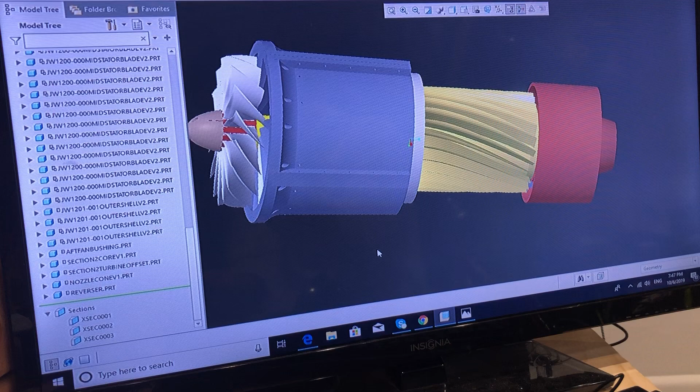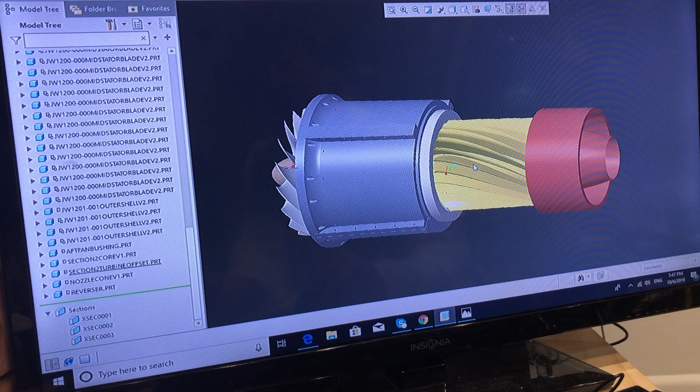So this time I can explain more to understand what I'm trying to do here. Basically, this is my prototype demonstrator to how all this design and flow will work, and that's what I'm trying to study. After that, I'm trying to build all this in a full metal part other than 3D printed plastics. So I am very beginning step of development and trying to study how all this works.

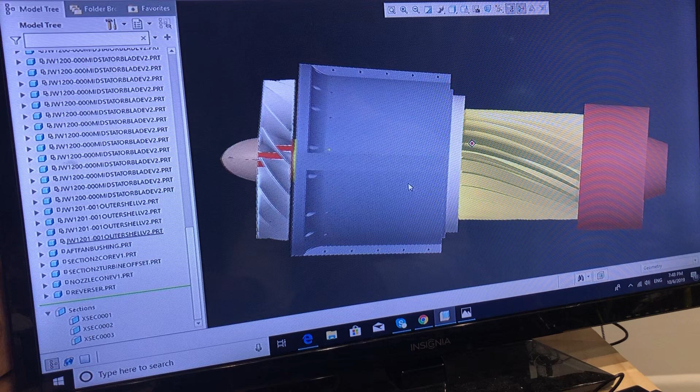So this is what I can explain for now, and then later on if I add more parts I can probably explain better what I'm trying to do here.

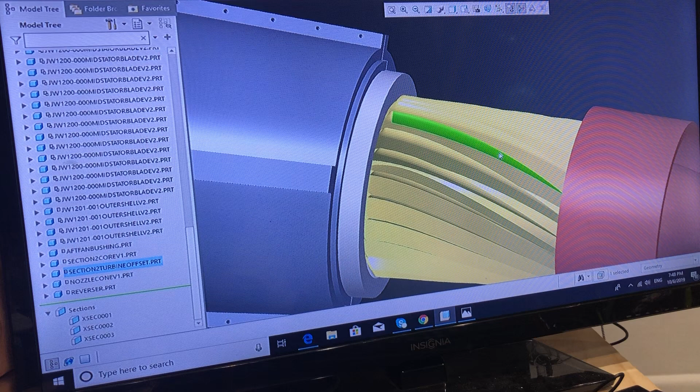So I've added 3 more parts here, which is a stationary stator section, this is the turbine section, and this is another stationary nozzle section. It doesn't have the support here yet. I've actually designed it, but I removed it because I had to think of something else on designing.

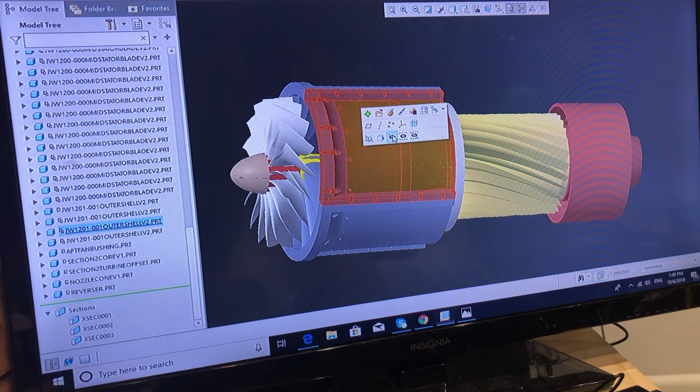But it's pretty much more shaped, or has more of an engine shape than last video. So let me explain.

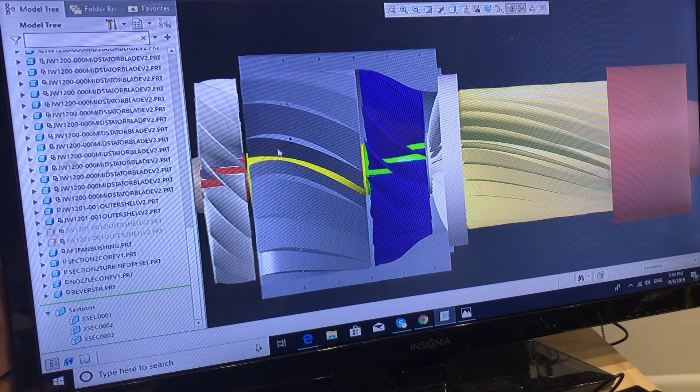What I'm trying to achieve here is airflow goes in there and is directed by the stator, the middle stator, and then captured by the secondary blade. And then there's also a secondary stator here, which directs the flow to the spinning way of the turbine, and this turbine will exhaust airflow toward backward.

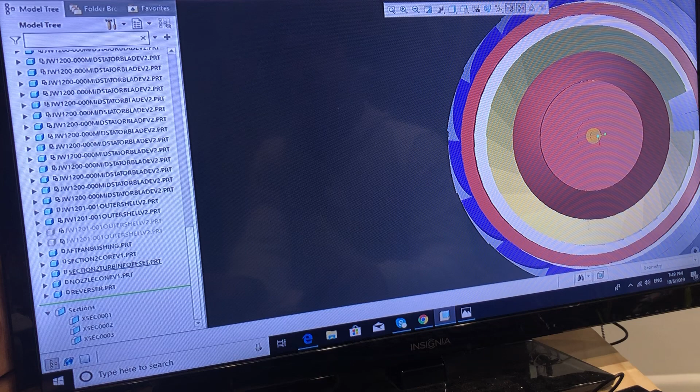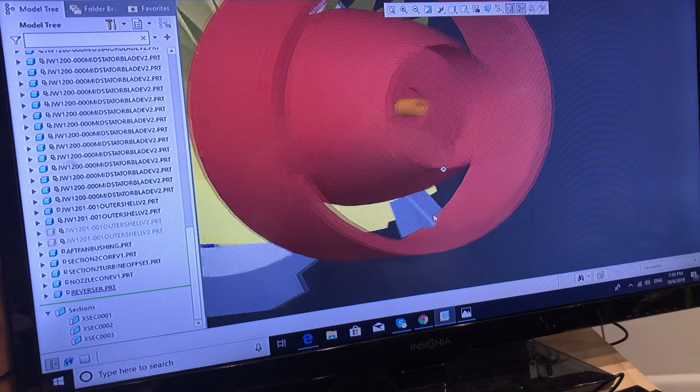I have something concept drawn in here. It's not finished yet, so I'm actually thinking about what I'm gonna do on this right now. But basically what it does is it'll block the flow and spit out the exhaust downward, which makes a vertical takeoff and landing possible.

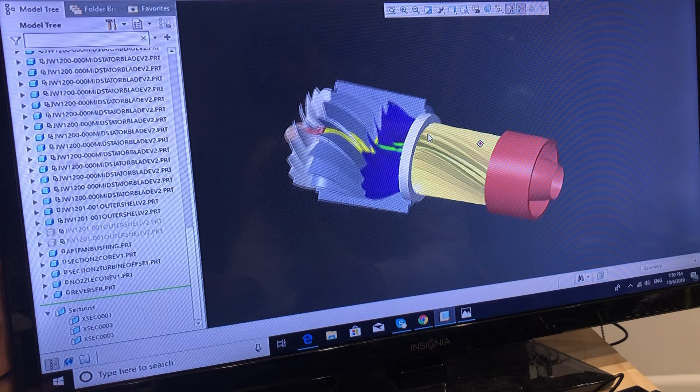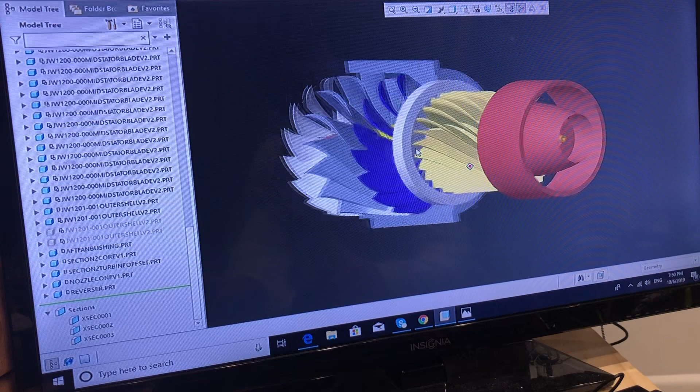Without moving or rotating the whole engine this way, but just changing a little bit of mechanism in here, closing this and opening up the ports or gates here, and spitting out the exhaust downward. So I'm not there yet because I don't have a clear idea yet, but I have some concepts in my head. So next video I'll probably update that as well.

On this part, what makes it a little bit difficult is I have to design each part within the capability of my 3D printer, which is not very large. It's only like 9 inches by 9 inches by 9 inches.

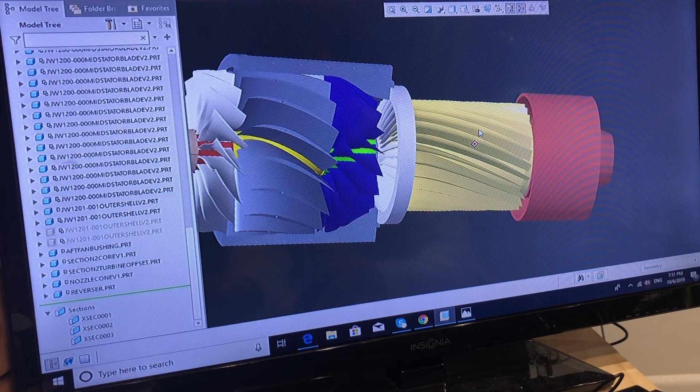So I also have to make sure that none of these parts start printing in the air, because that would actually mess up the whole print process. I have to keep that in mind, which is, I would say, difficult—maybe not difficult, maybe a little bit of an annoying factor, but it's okay. I can just work with what I have here.

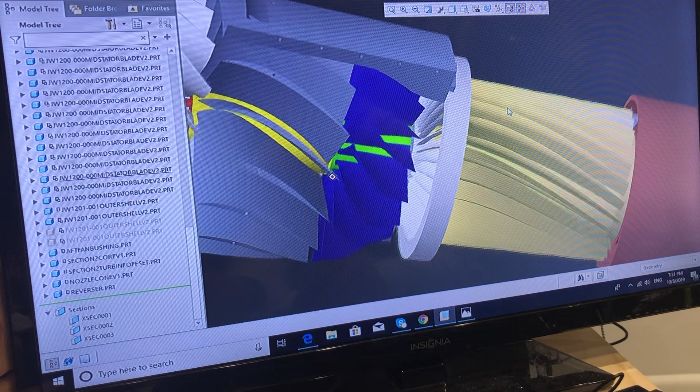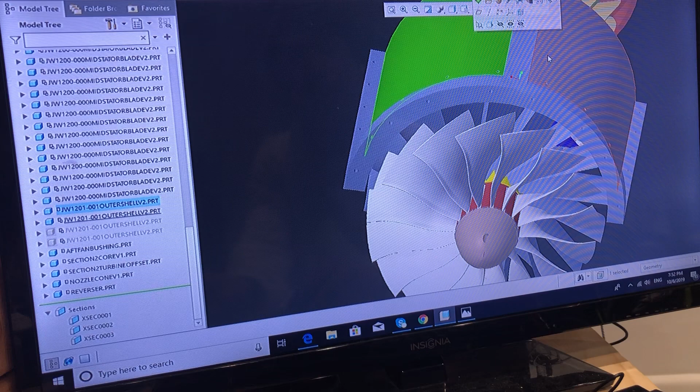I think I've already added a hole before in the video, but I haven't explained it yet. These holes are for just putting these four outer shells together. I highlighted 2 shells, but it's a total of 4 outer shells. So it'll just be held by bolts and nuts.

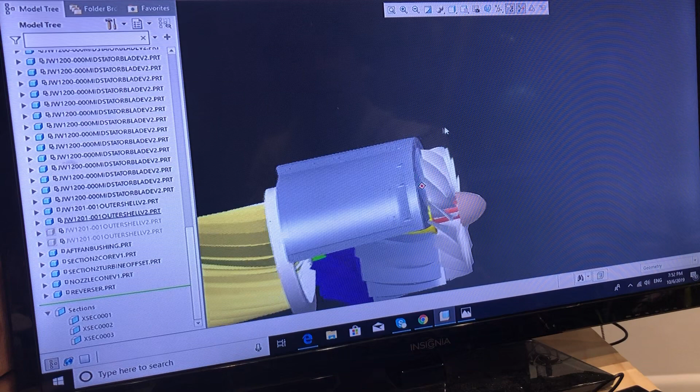But again, this is just a concept, and this will just go on the test stand. It's not gonna go on any aircraft model yet, but I am also thinking of designing that—I have a long way to go. I also have another screw hole to hold the front nozzle, or rather, the front air intake section, which I've already designed but needs some modification, so I haven't added it here yet. But basically it's gonna look like a conventional jet engine intake for now.

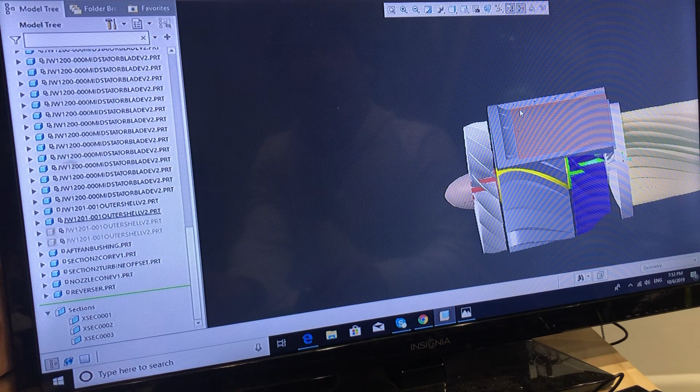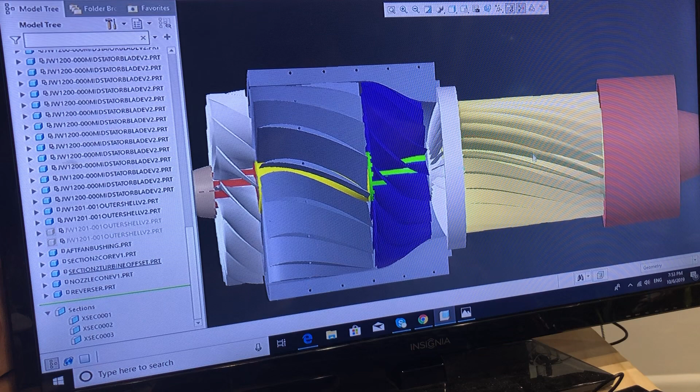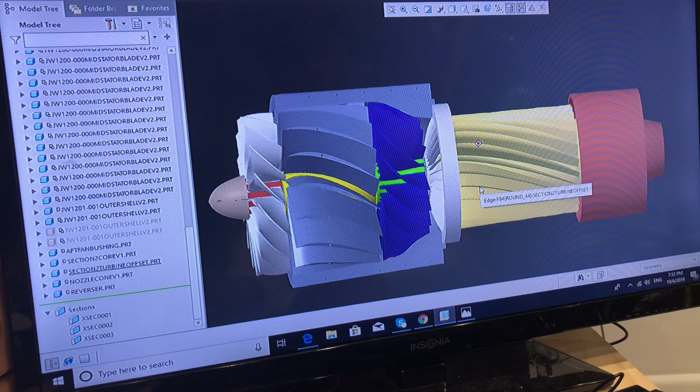So the CAD part is, so far, this is my progression, and my hardware part is, let's take a look.

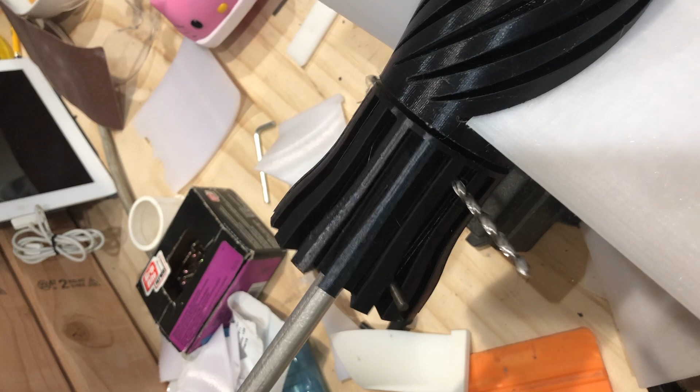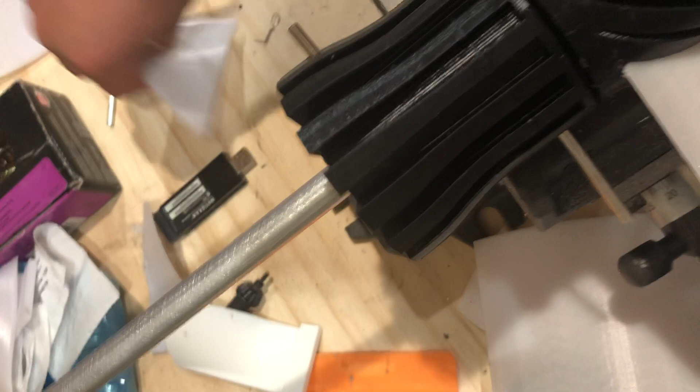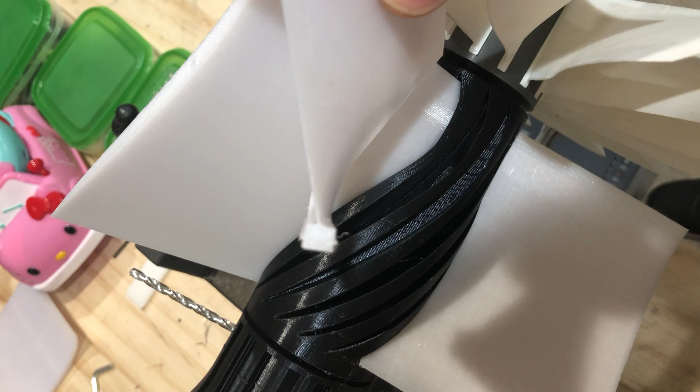I have printed this mid stator core, and then a secondary blade core. The secondary blade core no longer has the conventional dovetail design like I had in the first blade, but it does have a little notch - it's a rectangle shape with a little notch in it. The blade also has a notch that'll fit through the core.

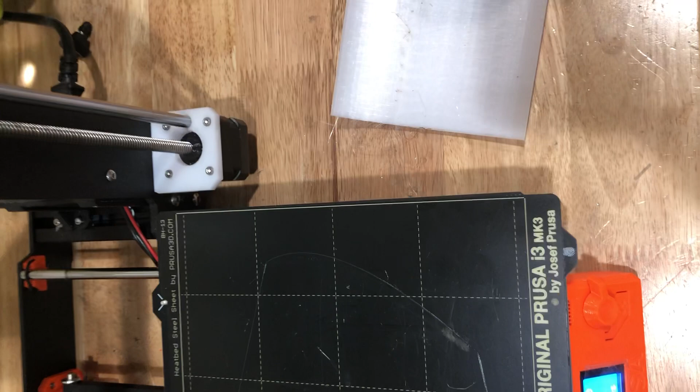Also, this stator blade I have printed - I have 2 installed right now, but I printed 4 more here with my 3D printer. This is the Original Prusa i3, recommended to me by a friend at work, and it works very well for what I'm doing because it's really precise on the size, which is critical for me to adjust.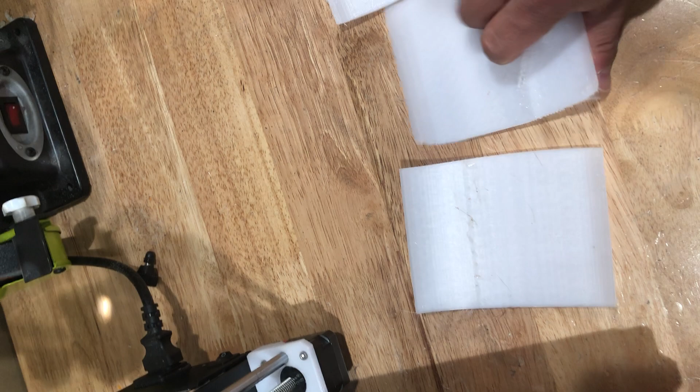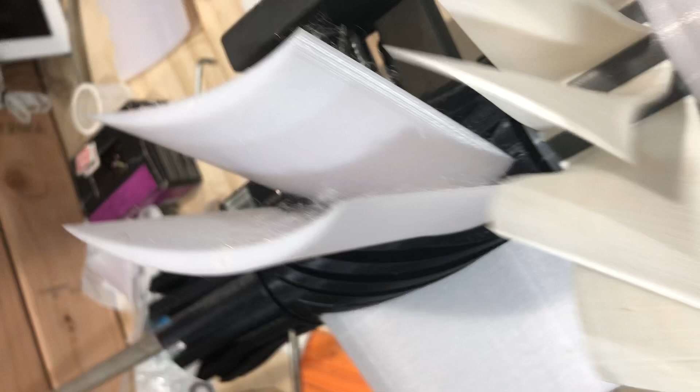So one of these blades will fit in these slots, and I had to modify the size of each blade itself and the core, because if I make an even size, I have to basically hammer it in to get it to fit, and by the time I hammer it in, it just shatters. But this is how it's going to be.

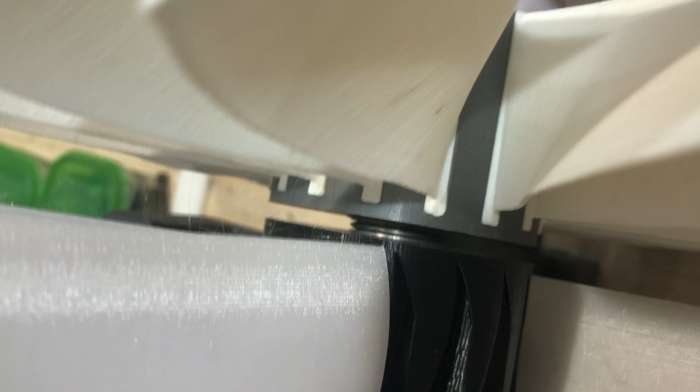For this, I've put a drill bit here for now acting as a pin, but I've already ordered a real pin - this is 5/32, which I think is 0.160 size. This has been drilled through the shaft so it can spin the shaft. Also, the thrust bearing and ball bearing are installed, and it spins nice and smooth, freely.

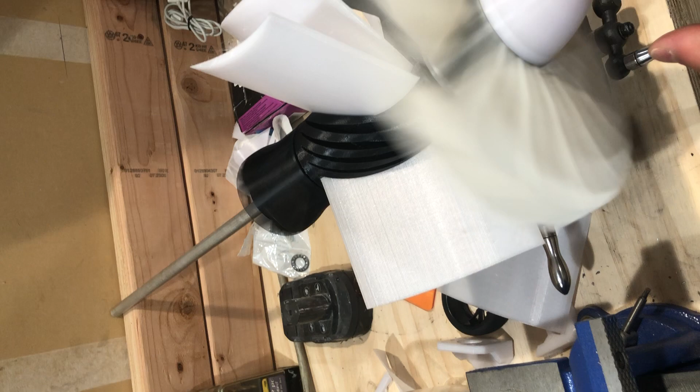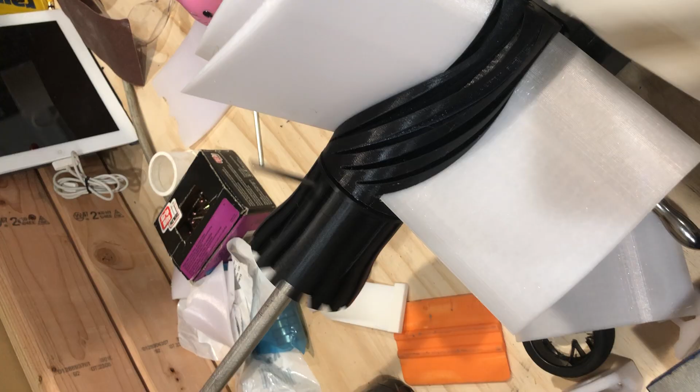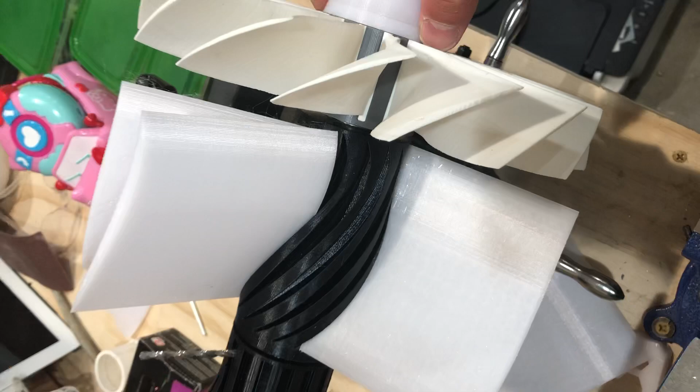As you can see, the shaft is bent, so I have another shaft on order. This one is aluminum, but I ordered a steel one this time so it has more structural integrity, because I think it bent from me banging it on the floor to install the bearings and all these parts. So this shaft is no good anymore - next update, I hopefully have the steel shaft.

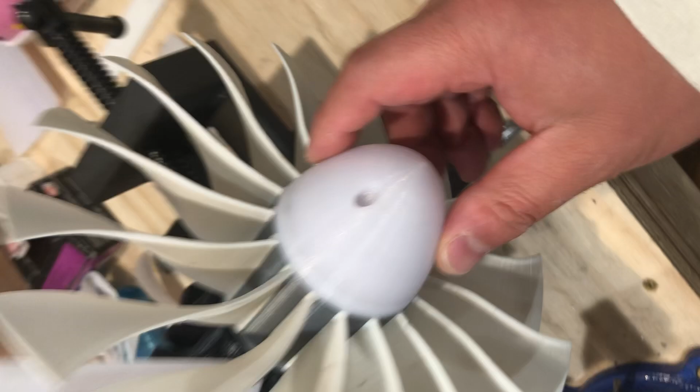This is a spinner, which I also printed from the printer. It's held by 2 screws, which I had to modify as well, of course.

So far, this is my progression, and next time it will look more like my CAD model, and I'll try to do my best to upload a video as quick as I can, but yeah, I'll try.